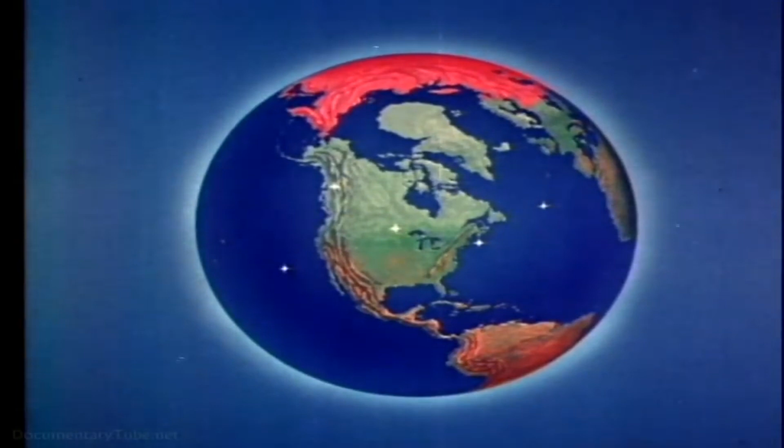When you have a well-trained maintenance man with a well-adjusted radar at a well-chosen site, then you've really got a winning team. They keep the airborne radars operating and ready for crucial missions. In missiles that depend upon radar for guidance. In bombers that depend upon radar for bombing and navigation. In interceptors that depend upon radar for fire control. And in reconnaissance and search aircraft that depend upon radar to extend their vision.

Years of scientific research and millions of dollars worth of equipment have gone into this aircraft. But only if the maintenance men keep the radar functioning can it complete its mission. When something goes wrong, they've got to make a quick decision, whether to attempt repairs in flight or abort the mission.

There's trouble here, that's for sure. But what kind of trouble? First, they check the radar scope presentation. Sometimes this gives a clue. But the most reliable analysis comes from the test equipment on the monitor panel. The spectrum analyzer shows them the conditions in the circuit. It tells them what part of the equipment is malfunctioning and helps trace the cause of trouble.

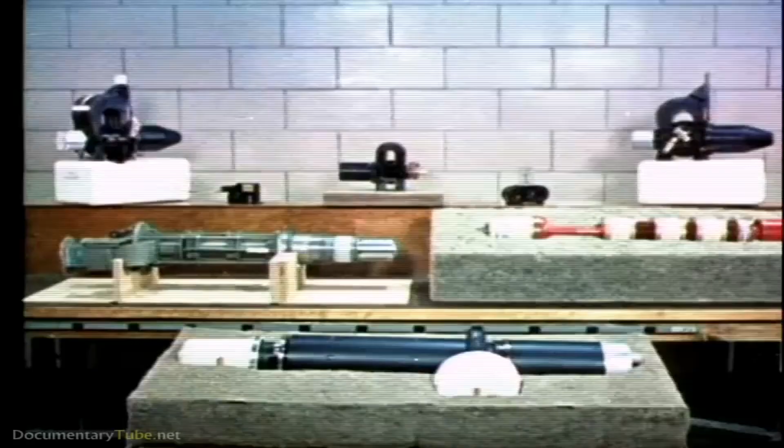The cause might be moisture in the waveguide, corrosion, dents, or scratches. Another trouble spot could be the pressurized antenna system. Loss of waveguide pressure will also cause arcing. Yes, the pressure's low. This is a danger signal. If this arcing continues, the magnetron output window may be damaged, the tube's vacuum lost, and the magnetron destroyed.

Waveguide joints should be tested to make sure they're airtight. This man is making a liquid soap test. See where the bubbles are forming? He's found the trouble. But how serious is it?

He checks the spectrum analyzer again. It looks bad. See how the pulse has changed? Finally, the main pulse deteriorates completely. Bad news. The magnetron is seriously damaged. It's beyond repair. This means shut down the equipment and get ready to install the spare.

While they're working, let's take a look inside the magnetron. Animation shows what caused the malfunction. We'll turn time back a few hours and show the Maggie functioning normally. As the pulse from the modulator is applied, the Maggie produces radio frequency oscillations to form the radar pulse.

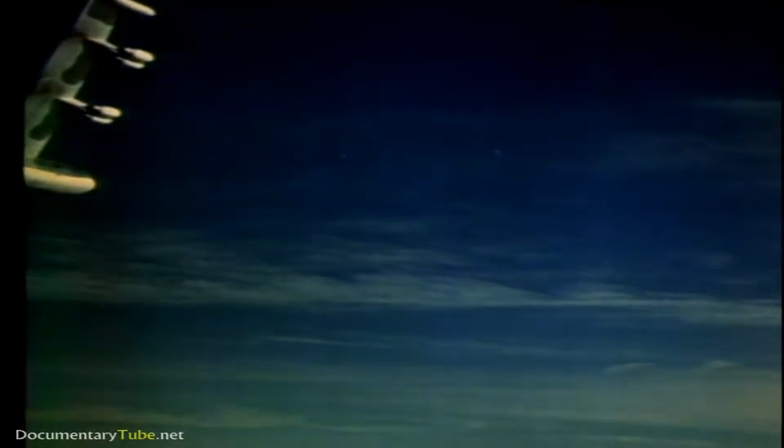But as conditions such as loss of waveguide pressure develop, the antenna characteristics change and the reflected wave becomes greater. Then arcing may take place at the point where the radar wave leaves the magnetron, causing the magnetron output window to crack or puncture. As the vacuum is lost, the heater oxidizes and burns out. The cathode cools. Air seeps into the interaction space, and arcing occurs with each pulse.

After the magnetron has been unbolted, the filament and cathode connections are uncoupled. A large magnetron like this one requires two men to handle it safely.

Before a Maggie is replaced, all connections, mating flanges, and sealing surfaces should be inspected. Insulating oil should be examined for foreign matter. Damaged or worn gaskets should be replaced.

Heater's supply voltage should be established at the value marked on the tube. Later, when the plane returns to base, the heater voltage should be double-checked with an accurate instrument.

The completed assembly is heat treated to bake out gas molecules, so that they may be removed by an evacuation machine. External mechanical parts, such as couplings and magnets, are installed. The final step is rigid testing of electrical performance to make sure it meets the high standards required.

Pressure tests ensure leak-proof connections throughout. Now the tubes can be put into storage. Even here, should tiny defects develop while on the shelf, continuous sample testing will reveal them. Before shipment, the delicate tubes are carefully packaged. The quality designed in during research, built in during manufacture, maintained by rigid testing and careful storage, will reach the user intact.

Here are a few basic rules on proper handling. Always use 2 men to lift a heavy tube. A portion of a carton makes a good tube stand, protecting delicate parts from damage. But a wooden rack is better and lasts longer.

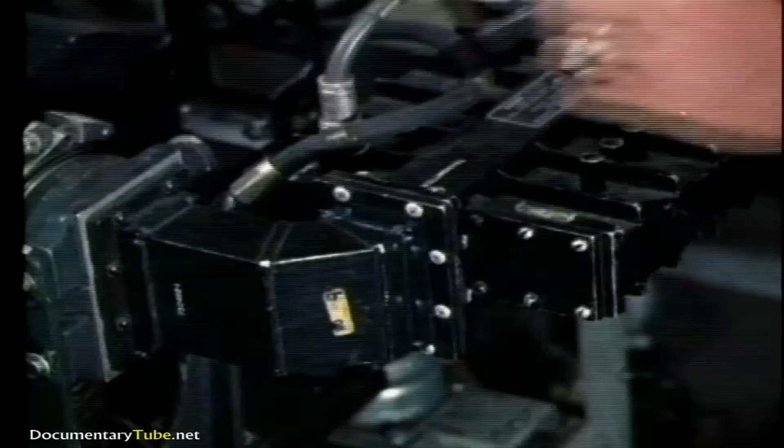Save all the cartons and packaging materials. Use them to return defective tubes to the factory. Magnetrons should be separated at least 12 inches. Then their magnetic fields won't interlock. Don't store them on steel shelves or they may be degaussed.

Don't use steel tools. Use non-magnetic tools. Following these simple rules will save time and trouble, prevent damage, and save the Air Force many thousands of dollars each year.

On most of the smaller high-performance aircraft like this one, it is not possible to do in-flight radar maintenance. Therefore, most of the work must be done in the electronics maintenance shop. This aircraft has just aborted an intercept training mission. The reason: radar malfunction. Had this mission been the real thing, an enemy bomber could have broken through our defenses. The maintenance man's job is to find out why the radar malfunctioned and correct the trouble.

You'll see that although these radars come in smaller packages than those on larger aircraft, they are just as big a maintenance problem. The maintenance supervisor is in charge of this work.

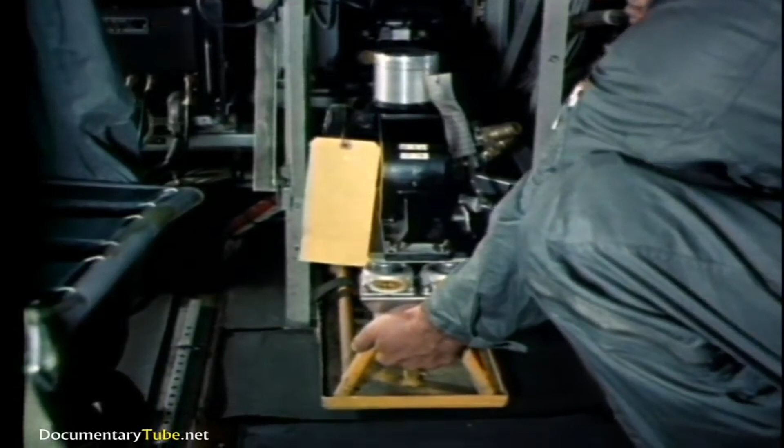An important point to remember is that the transmitter malfunction may be caused by parts other than the magnetron. Wherever possible, other circuit components should be checked before power is applied. A simple resistance check will often reveal a short circuit. That's what the trouble is here.

The airman will carry on from here and trace the short circuit. So far, so good. He's found a shorted filament transformer and replaced it with a new one. But what's this? He's decided to change the magnetron, too. The supervisor disagrees. Tube swapping is not a good idea.

The old magnetron should be thoroughly tested before any decision is made. Testing showed that the old magnetron should be replaced. This has been done. Now let's see how the new Maggie behaves. This is confusing. The spectrum analyzer shows arcing.

Let's look inside the tube and see what's causing it. Magnetrons are made of porous metals, which usually trap a small amount of residual gas. During storage, gas molecules migrate into the interaction space surrounding the cathode.

When the tube is installed and power applied, it will operate normally if the gas content is low. But if gas content is high, arcing will occur with each modulator pulse. This arcing might be mild or severe.

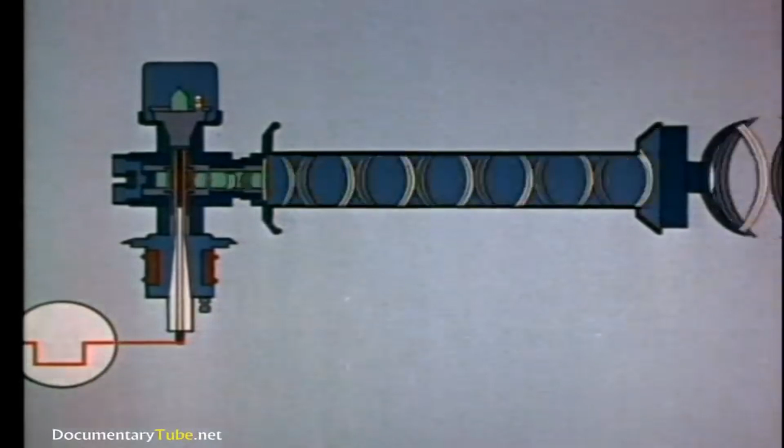Small magnetrons may be damaged if severe arcing is allowed to continue more than 2 seconds. Now the range selector switch must be changed to short pulse before the magnetron is operated.

If only sporadic arcing occurs, operation may be continued. But a series of arcs may cause the overload to pop. In this case, reset the switch and continue the break-in.

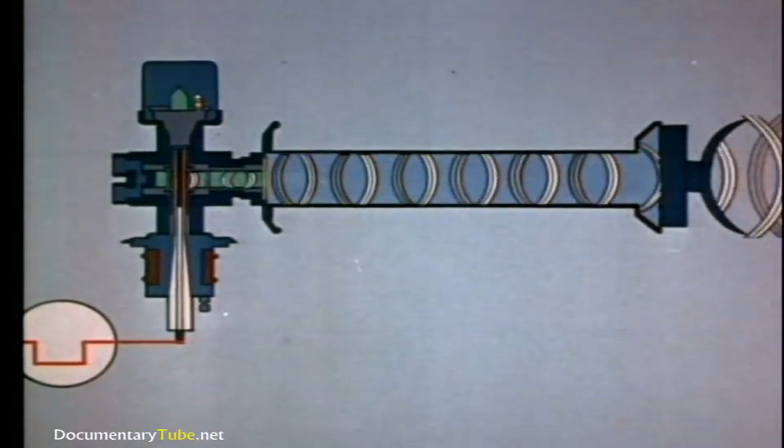To avoid possible damage during break-in, the technician should keep a close watch on modulator tubes and other components of the RT unit. The time required for break-in will vary with the tube, conditions, and methods used, but normally break-in can be accomplished in 20 to 60 minutes. When break-in is complete, and only infrequent arcs or misfirings occur, operation may be regarded as normal, and the equipment made ready for service.

In addition to the airborne radars, there are a great many ground radar sites scattered about the continental United States and Canada. They are found in almost every type of American scene: in the dusty expanse of the plains, in the northwoods, the heat and humidity of the deep south, in the rolling farmlands of the Midwest, and the salt water scenes of our coastal areas.

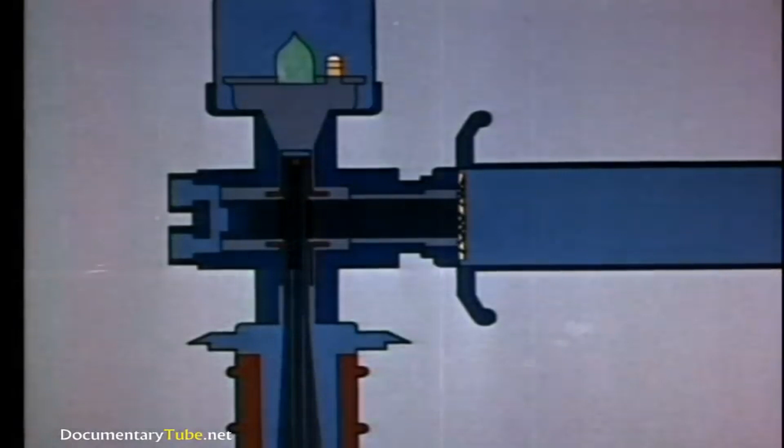Each of these has its own problems of maintaining and efficiently operating its microwave power tubes on a round-the-clock basis. Some of this equipment is completely automatic, but experienced technicians are always nearby, just in case. At the many radar sites where there is no standby equipment, the maintenance man is an even more vital unit in the organization.

In the operations room, observers keep constant watch on the radar scopes. Here's trouble developing.

When equipment starts to malfunction, quick repair is a must.

These men are so used to the sound of the equipment, they can tell by listening whether the magnetron is operating or not. It's not.

Something caused this radar to quit. What was it?

Sometimes the meters will tell the story. The filament current has dropped to 0, and the filament voltage is too high, indicating that a portion of the heater element is open. A quick, careful analysis has to be made.

Here is where maintenance skill and training pay off.

The question is, has the magnetron become inoperative because of heater failure? Or is there another cause? Yes, here's something. The insulator is pitted.

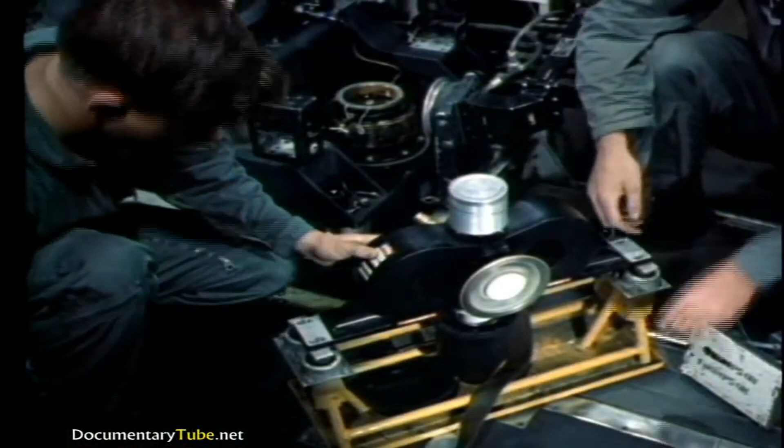Here is how contamination breaks down oil. As contamination accumulates in the oil, current paths are created between high voltage terminals and ground. As the condition becomes worse, due to increase of contamination and change in oil structure, a definite high voltage path for corona discharge is created in the oil.

The corona discharge begins to erode the surfaces of the insulator. As the insulators are penetrated, the vacuum in the tube is destroyed, and the tube is damaged beyond recovery.

The maintenance men have completed oil replacement using all precautions to prevent contamination. They have checked the grade of oil against tech orders and factory instructions.

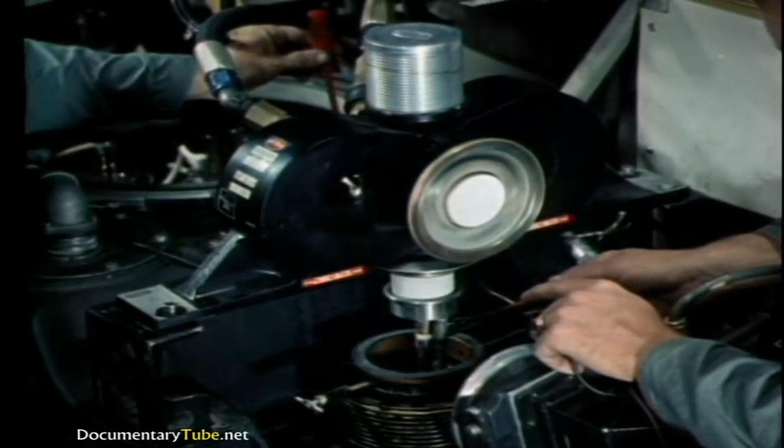But before installing the new Maggie, all mating surfaces and flanges must be inspected and cleaned or replaced as required. It is also necessary to check waveguide parts, replace gaskets, coolant hoses, oil fittings, and so forth.

Be sure all electrical connections are secure. Careful, watch out that terminal doesn't hit the cabinet. That could ruin the tube.

Make certain that all clamps, bolts, coolant hoses, and so forth are secure before operating the tube. All set? Okay, hit the power button. Uh-oh, that one didn't last long.

There are many reasons why new tubes may fail to function properly. One of the primary causes of tube failure is damage sustained during transportation and handling. This damage may occur during shipping or in the depot, or during Air Force distribution to the base.

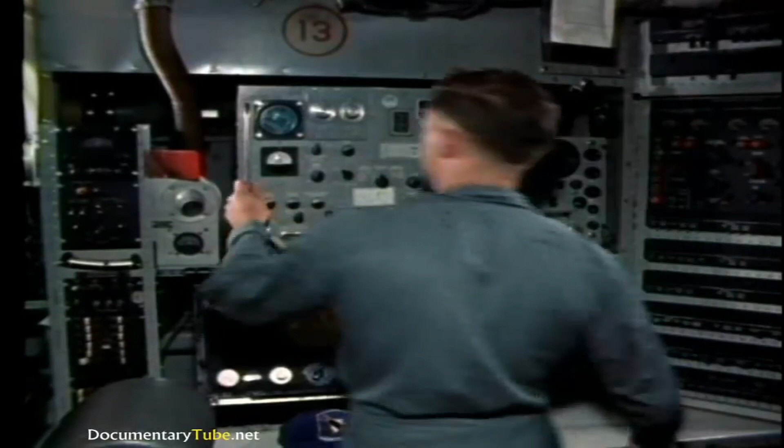Here is what actually happened to that new tube which failed to operate. Nobody saw it happen. Nobody's going to tell, and nobody's going to get the slightest use out of that magnetron.

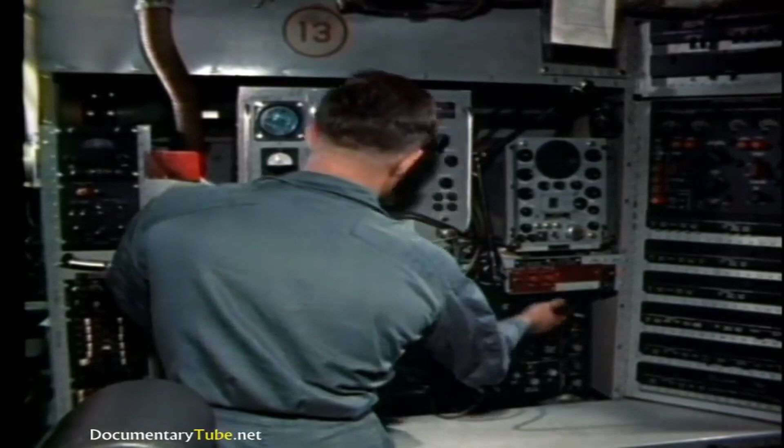But these men don't know this Maggie fell off a truck. They just know it won't work. Could it be something wrong with the rest of the equipment? A short circuit? A bad connection? Or should they pull out this Maggie and install another?

They've installed another new Maggie. They've also followed correct procedure, allowing the heater to warm up 5 minutes before applying power to the anode. Ah, it works.

But wouldn't it have saved them a lot of time and trouble and expense to the government if that delivery man hadn't dropped the Maggie off his truck? You see, the maintenance man really is important. If he does his work correctly, so will the radar. The magnetron is only one type of microwave power tube used by the Air Force.

Another and very important type is the power klystron. Klystrons are made in many shapes and sizes. All of them are powerful and expensive, ranging all the way from $1,500 to $25,000.

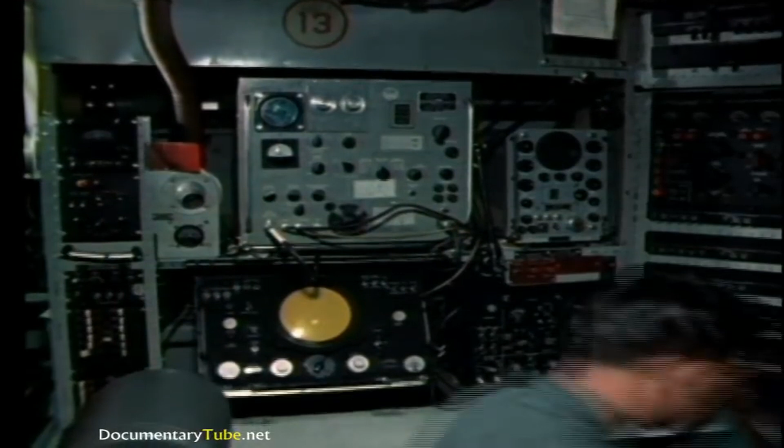Let's look inside a typical two-cavity power klystron and see how it operates. The beam current is emitted by a heated cathode and passes through the drift tube sections.

Since electrons in the beam have like charges, they repel each other and tend to diverge, to be absorbed by the walls of the drift tube sections. But electromagnetic coils placed along the tube align them into straight paths. However, misalignment of the focus coils can seriously damage the drift tube tips. Therefore, it is most important to adjust the magnetic coil currents properly during installation of the tube.

When a steady, direct current is flowing through the tube, an RF signal from the RF driver stage is introduced into the first cavity resonator. As the cavity is tuned to resonance, a strong RF field appears between the drift tube tips, which form a gap in the resonator.

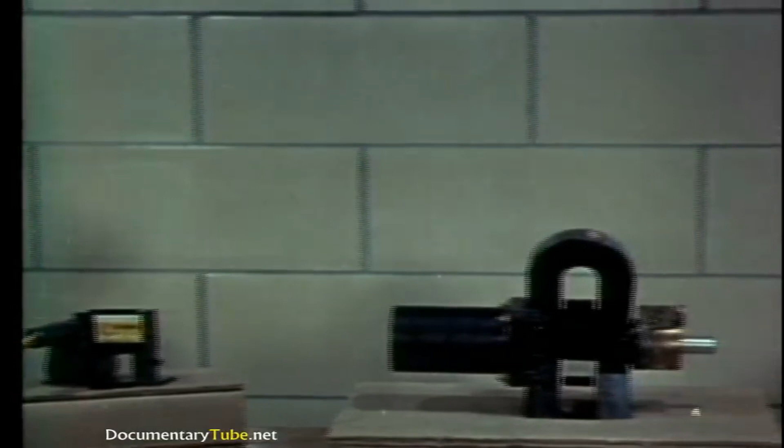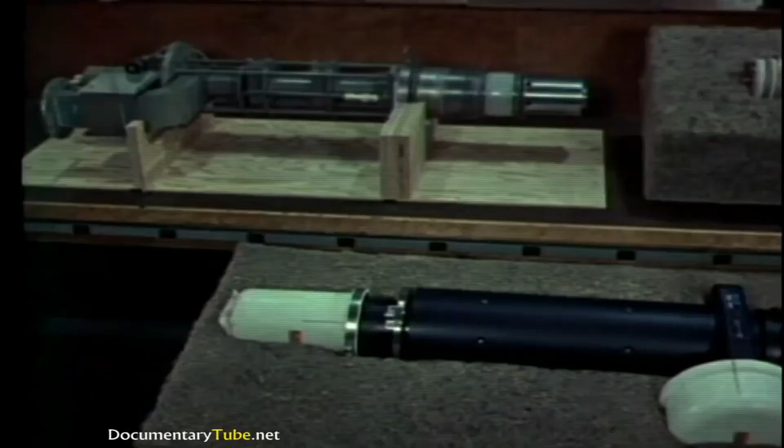The electrical charges on these tips alternate at the driver frequency rate on opposite sides of the gap. At the same time, individual electrons in the beam are being accelerated or decelerated at the RF frequency rate. This produces bunching of the electrons as they approach the gap in the second resonator. There they are decelerated and release energy. The resonator converts this energy to RF energy and amplifies it.

Additional resonators are sometimes provided for greater amplification. From the last resonator, the amplified RF signal is coupled into the waveguide and transmitted to the antenna.

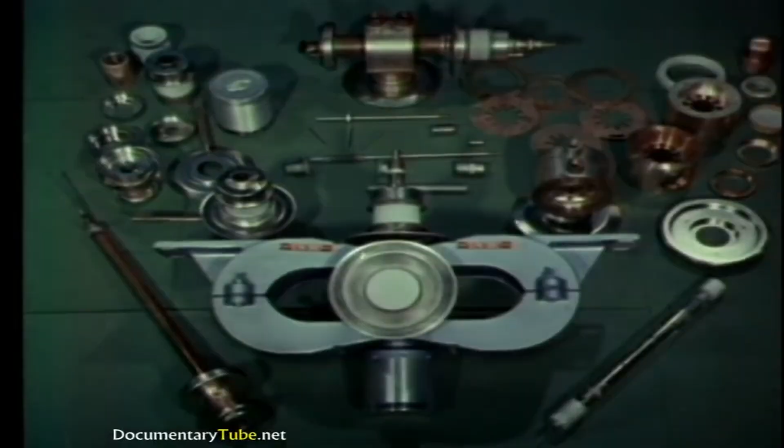Various kinds of klystrons are being phased into new Air Force applications, such as these tropospheric scatter communications transmitters. In this way, intelligence may be relayed from remote early warning sites to control centers many hundreds of miles away.

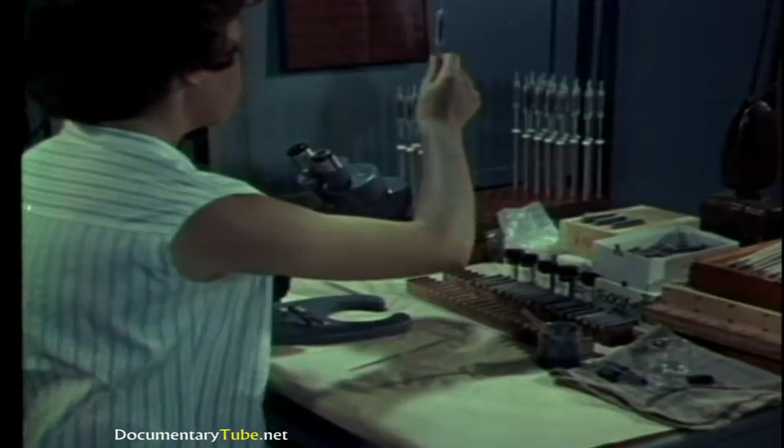This transmitter has dual equipment. One transmitter operates while the other is on standby in case of emergency. The equipment is automatic. Meters and instruments keep a constant check on its operation, and a warning light flashes in case of trouble.

And speaking of trouble, a glance at the meters tells them the trouble is in the transmitter output. The equipment is reoperated.

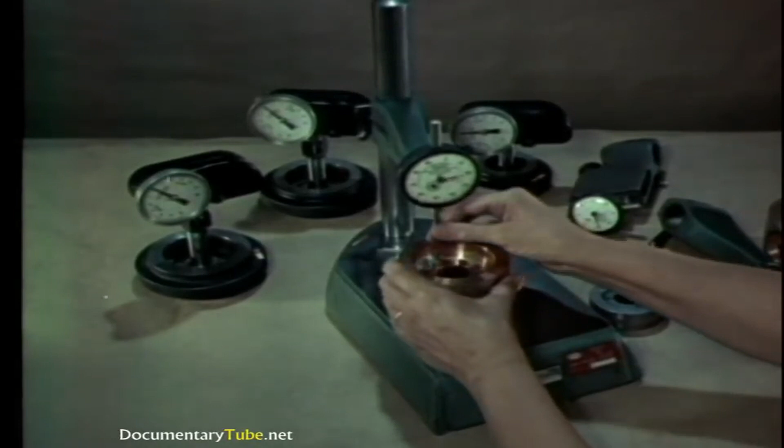Readjustment of the output cavity and coupler may correct the trouble, but the arcing continues. Since adjustment won't correct the trouble, all they can do is shut down the transmitter for repair and switch over to standby.

The klystron has been removed for inspection. It may have been damaged by the arcing. Yes, the output ceramic is badly damaged.

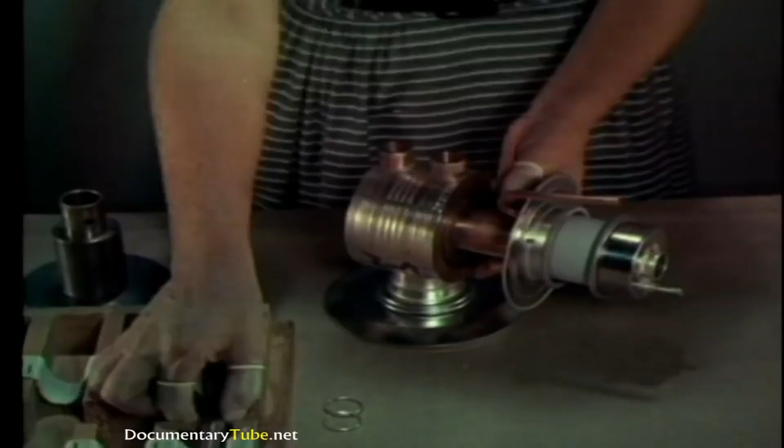An important consideration in maintaining the klystron is the proper adjustment of the impedance matching unit. In this case, improper adjustment of this unit during installation ultimately caused the arcing in the output section, which in turn destroyed the tube.

There are two types of meters which help maintain proper coupling: the power output meter and the VSWR, or voltage standing wave ratio meter. These measuring devices should periodically be checked for accuracy.

But in general, the best way to avoid damaging or destroying the klystron is to study and thoroughly understand the various installation and operating instructions furnished by the equipment and tube manufacturers. Only by doing this can Air Force technicians and maintenance men hope to get the full operating life from their klystrons.

At the Tropo Shack, the maintenance men have installed the new klystron. But before operating at full power, they are careful to recheck all circuit meter readings and coolant flow gauges. These meters are important because a minor error in one of the adjustments might shorten the life of the tube.

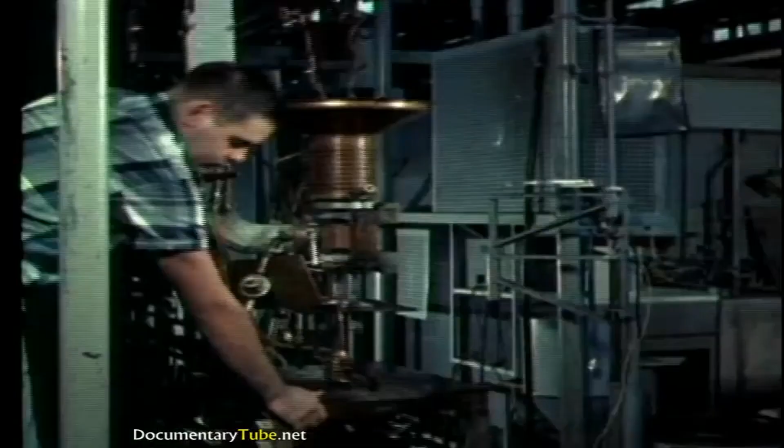The power klystron is really a very dependable piece of equipment if properly treated. Once it has been correctly installed and aligned, it requires very little maintenance during its long service life. A good rule to follow is: install it carefully, align it properly, then leave it alone.

As the progress of aircraft and air defense continues, other and more varied uses will undoubtedly be found for microwave power tubes. With these new applications will come new problems to be solved by maintenance men of the future. Those men will tread the paths charted by technicians of today, who found that this type of maintenance can be simplified by careful attention to four basic factors: careful handling,

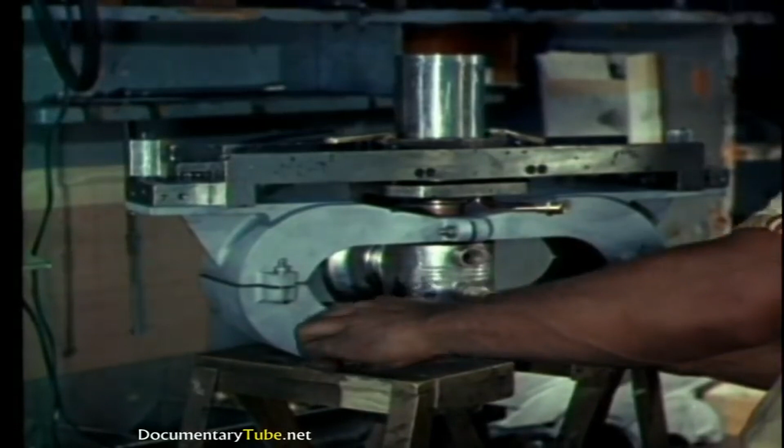proper break-in, avoidance of tube swapping and trial and error maintenance, and the timely use of maintenance aids such as test equipment, tech order handbooks, and manufacturer's information pamphlets. There is no substitute for know-how, initiative, and ingenuity.

Yet no one man or group of men can do this job alone. Maintenance is a team effort. Only by the cooperation of procurement, supply, transportation, and every department concerned can the Air Force continue to operate the reliable radar equipment which is such a vital part of national defense.

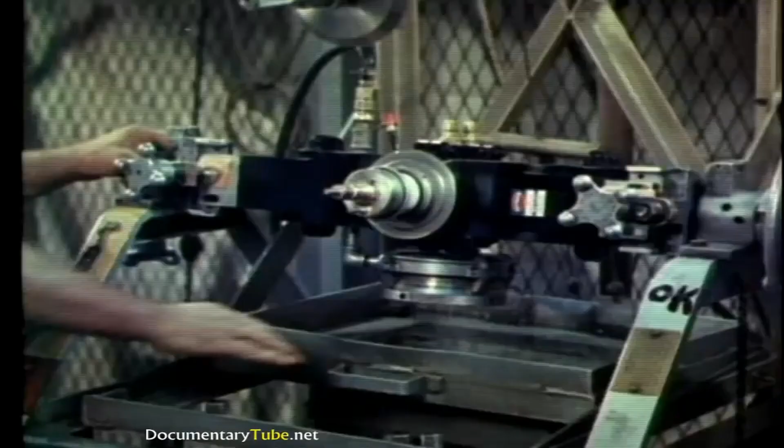Only by continued teamwork and devotion to duty can the radar eyes of America guide us to that peaceful tomorrow, which is the reward of nations who stay alert today and every day.